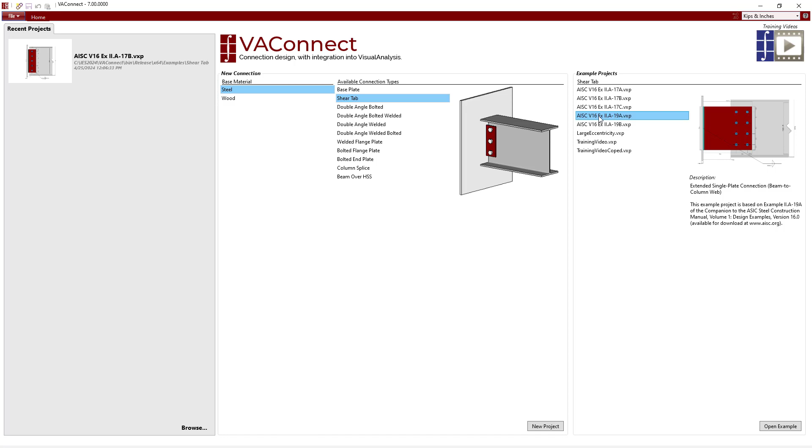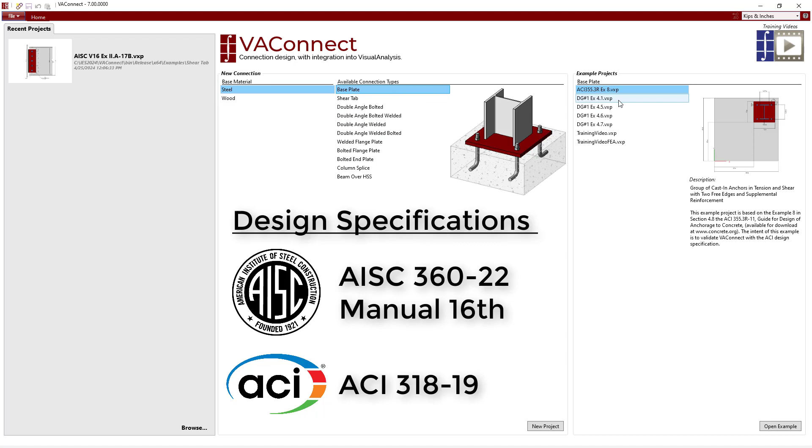In VAConnect 7, the steel design specifications have been updated to AISC 360-22, and the connections follow the updated methodology in the 16th edition of the Steel Construction Manual. Furthermore, the concrete design specifications have been updated to ACI 318-19, which is used for the concrete anchorage design checks in the baseplate connection.

In the startup page, we see that 3 new connection types have been added to the program. Specifically, a double angle bolted welded connection, where the angles are bolted to the support and welded to the beam, an all welded double angle connection, where the angles are welded to both the support and the beam, and a double angle welded bolted connection, where the angles are welded to the support and bolted to the beam, have all been added to the program.

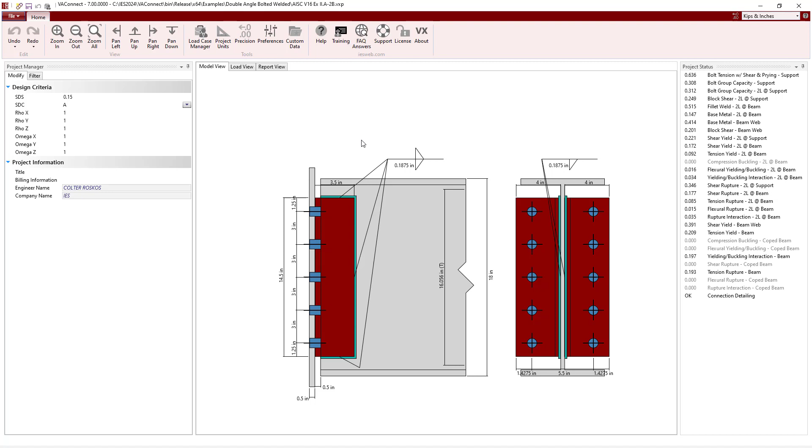Double angle bolted welded connections are designed according to the AISC 360 design specifications and both Part 10 and Part 12 of the AISC Steel Construction Manual. This connection type can be designed to resist both shear and axial loads, with the interaction of these loads being considered when necessary, as discussed in Part 12 of the Steel Construction Manual, which was just added in the 16th edition of the manual. For example, when the axial load is in tension, the bolts at the support are designed to resist combined shear and tension considering the effects of prying action.

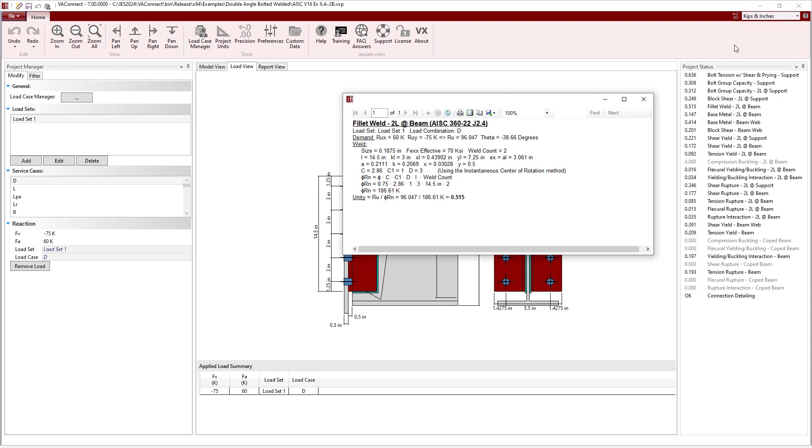The eccentricity on the beam side of the double angle connection is always considered using the instantaneous center of rotation method to determine the eccentric weld group capacity. For more specific information on this connection, see the double angle bolted welded training video.

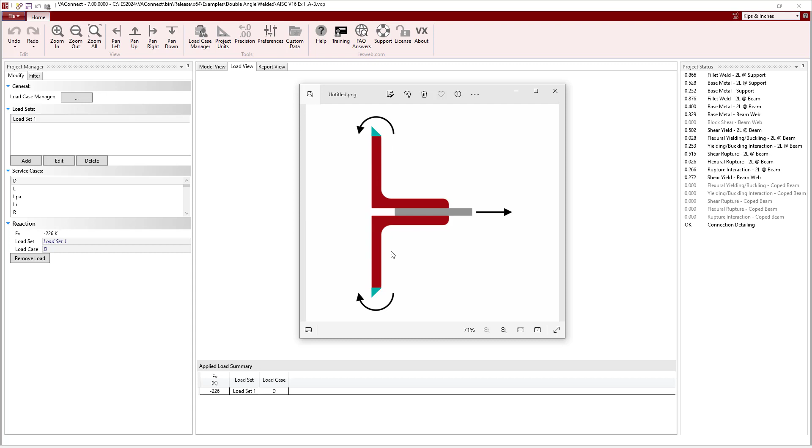Double angle welded connections in VAConnect are designed according to the AISC 360 design specification and Part 10 of the AISC Steel Construction Manual. This connection can be designed to resist only shear loads. According to Part 12 of the Construction Manual, double angle connections with welds on the outstanding legs provide minimal strength to resist axial load due to the flexural loading that is applied about the longitudinal axis of these welds.

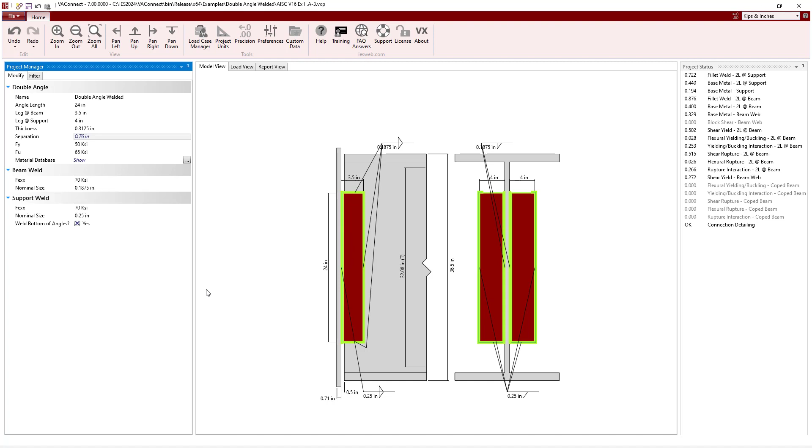Both the welds at the support and the welds at the beams are designed to resist the eccentric shear loading using the instantaneous center of rotation method to determine the eccentric weld group capacity. Note, while VAConnect allows welding along the bottom of the double angles at the support, it does not allow for welding along the top of the angles at the support, as this would inhibit the flexibility and necessary end rotation of the connection. For more specific information on this connection, see the double angle welded training video.

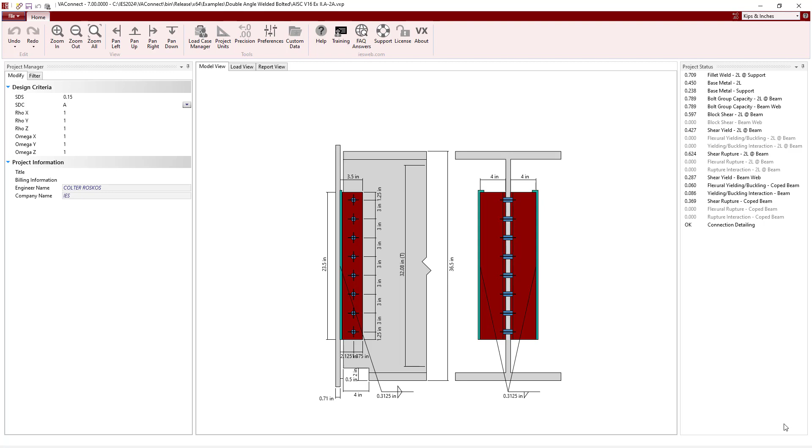Double angle welded bolted connections in VAConnect are designed according to the AISC 360 design specification and Part 10 of the AISC Steel Construction Manual. This connection can be designed to resist only shear loads for the same reason discussed for the all-welded double angle connection. When the dimensional limitations of Part 10 of the manual are satisfied, eccentricity on the beam side of the double angle connection is neglected.

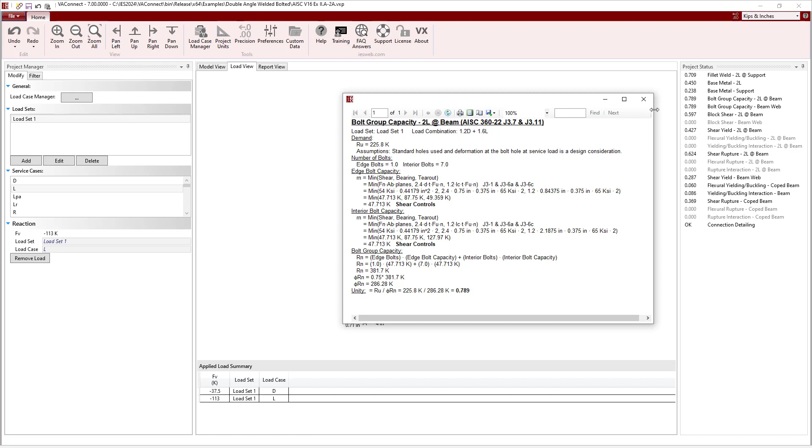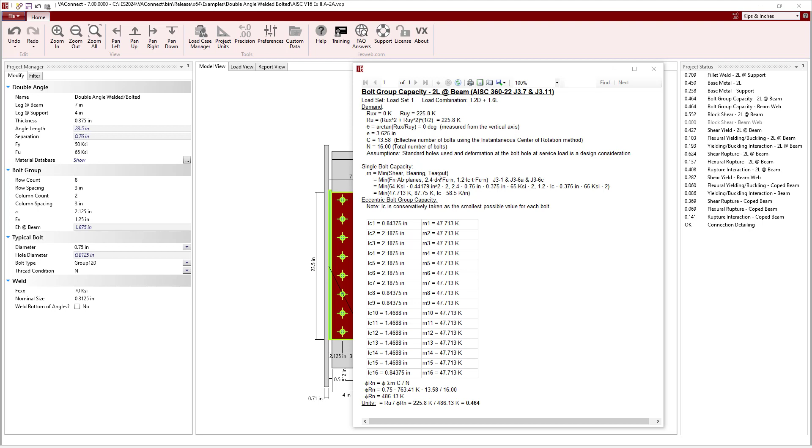When the Part 10 limitations are not satisfied, if, for example, there are 2 columns of bolts, eccentricity is considered using the instantaneous center of rotation method to determine the eccentric bolt group capacity for shear, bearing, and tear out at the beam side of the double angle and at the web of the beam. For more specific information on this connection, see the double angle welded bolted training video.

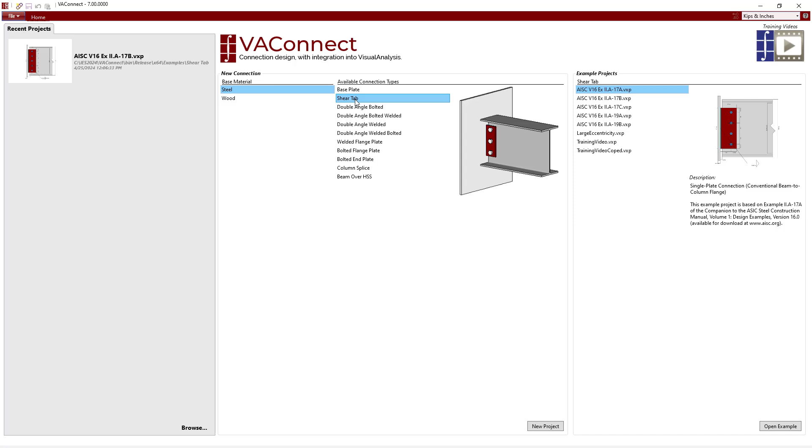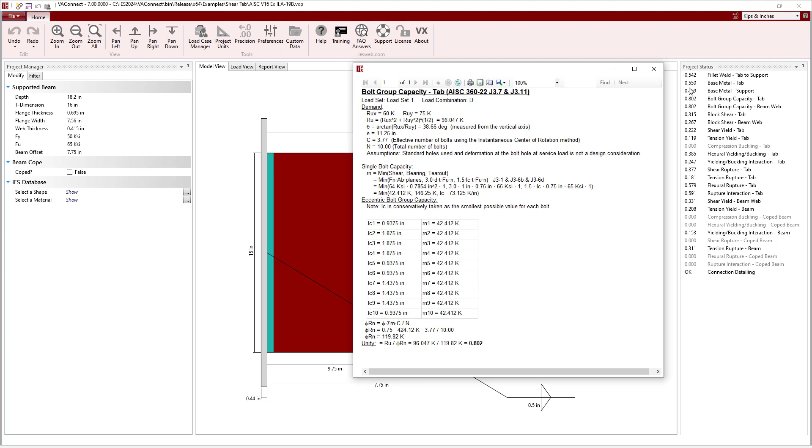In addition to updating the design specifications and adding additional connections to VAConnect 7, several improvements have been made to the program per customer requests. Now, both the shear tab and double angle connections can be designed with 2 columns of bolts at the beam's web. Additional example projects have been added to the shear tab connection, highlighting this change. Per a customer request, the bolt group capacity limit state has been improved to provide capacities that are more accurate and less overly conservative. More specific information can be found in the shear tab updates training video.

In addition to adding new features to VAConnect 7, improvements have been made to the help file, which is accessed by clicking the button in the ribbon. We hope you enjoyed the new connections and new features in VAConnect 7.